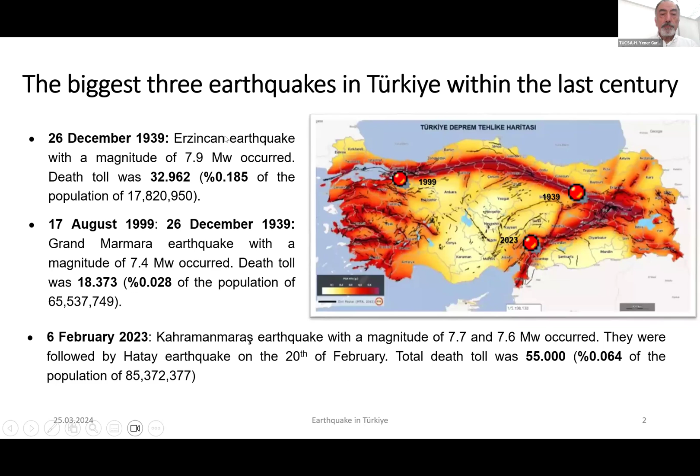Today I will mention about the earthquake that occurred on the 6th of February. This one hit 11 provinces in the eastern southern part of Turkey, particularly Kahramanmaraş and close to this area, Hatay. It was interesting because within the same day, 9 hours apart, 2 earthquakes occurred in this area, and it was very huge.

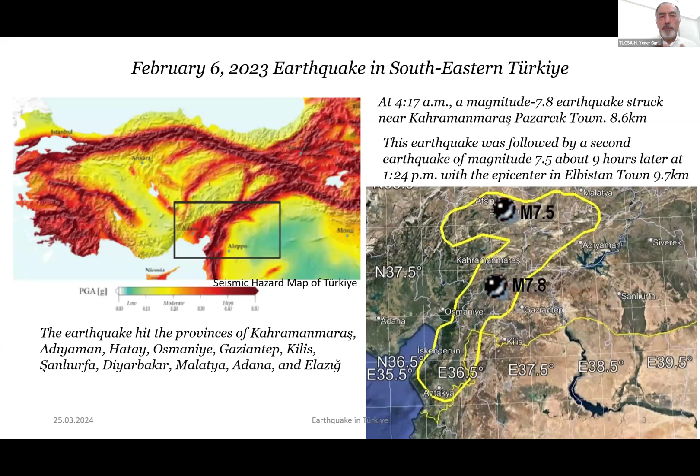In addition, although I will not mention about this later on, this is more than we expected in accordance with our scientific inputs.

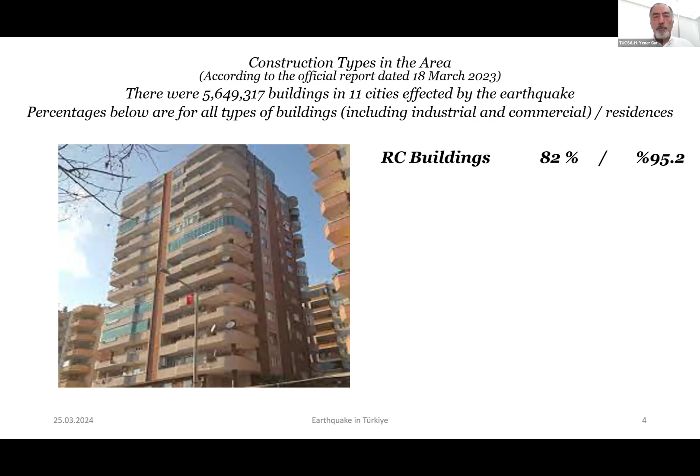Within this area, 82% of buildings were reinforced concrete in general. But when we turn to residential buildings, it was 95% of all buildings. Precast buildings also were serious, 3.6%, but for residential buildings it was 0.6%.

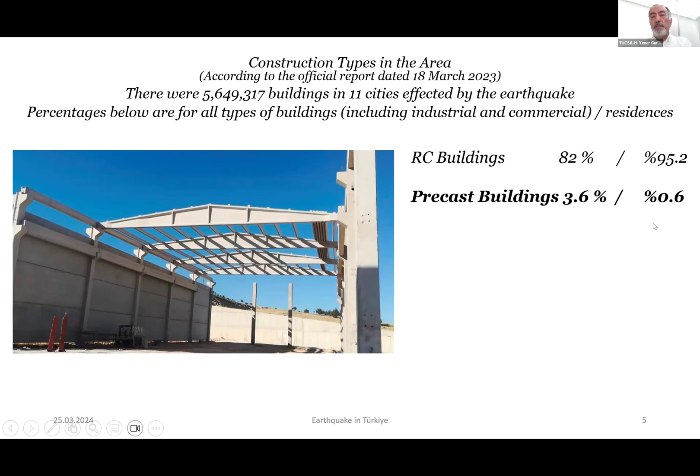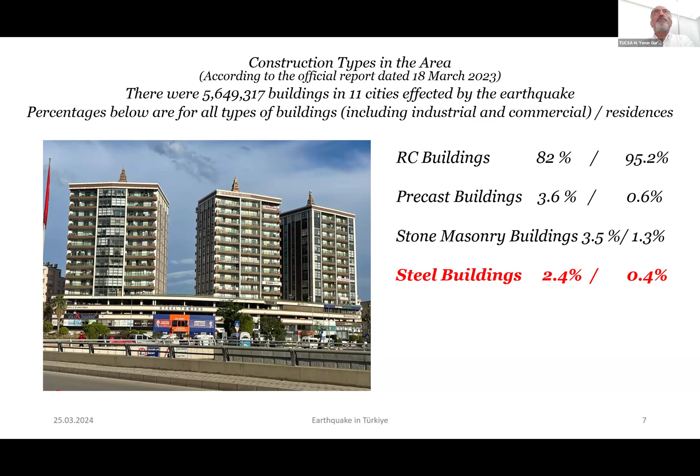Stone and masonry buildings were not so much. Steel buildings, very few - in general it was 2.4%, and for residential buildings it was 0.4%, unfortunately. These steel buildings were not damaged; they were very strong. Other buildings also not so much damaged.

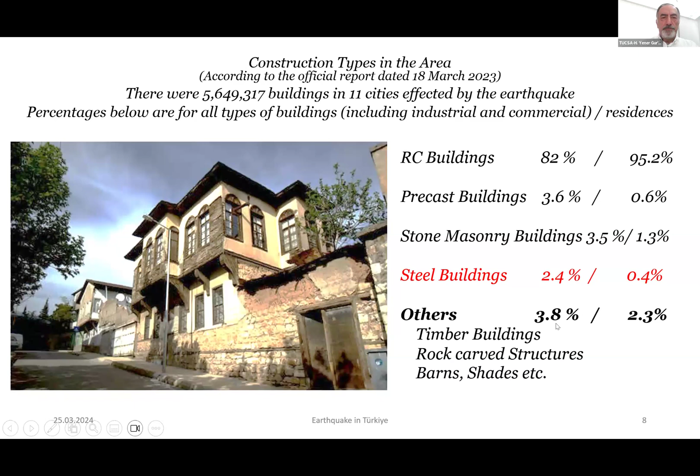Losses during the earthquake in this area, in accordance with official figures, were 55,000 people died, and 518,000 buildings were collapsed or heavily damaged, which is 9.2% of all buildings.

131,500 buildings had medium level damage, and about 1,280,000 buildings were slightly damaged.

No steel structure collapsed. 3 residential steel buildings were heavily damaged, I will mention later on. Industrial steel buildings performed very well.

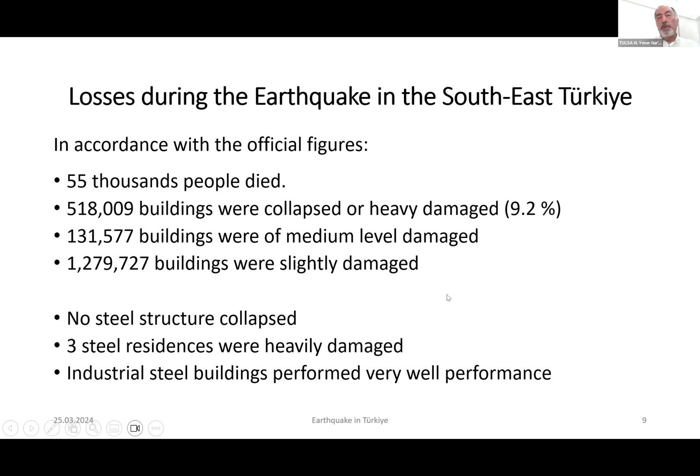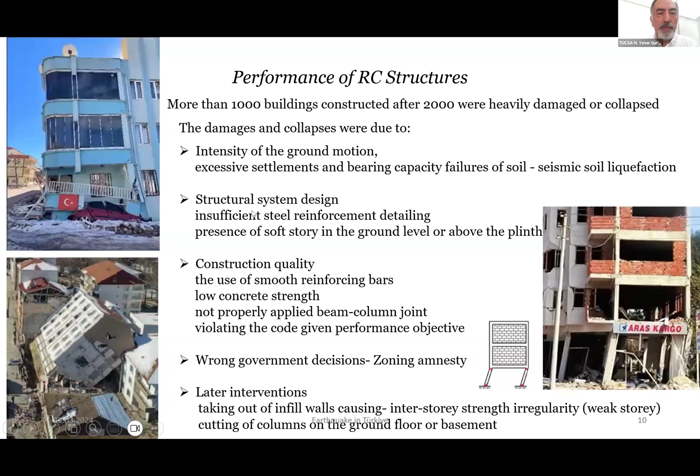Turning to performances of structures, reinforced concrete buildings were seriously collapsed or damaged, as you see here.

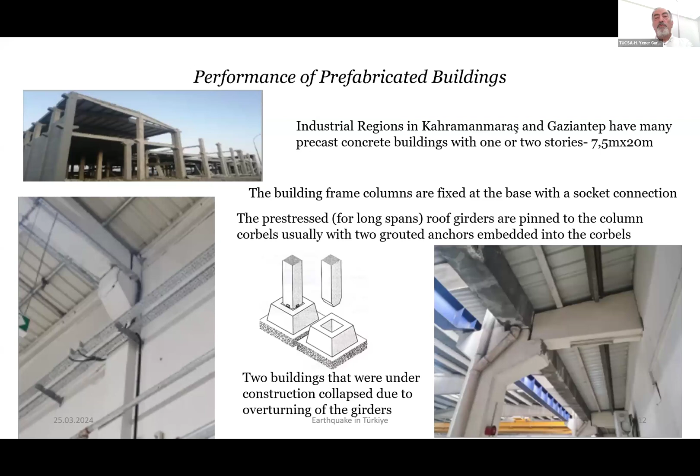Prefabricated buildings - connection points were weak and they collapsed as well. In addition, most industrial small buildings were constructed using fabricated, precast, prefab buildings, so almost all of them were collapsed or heavily damaged.

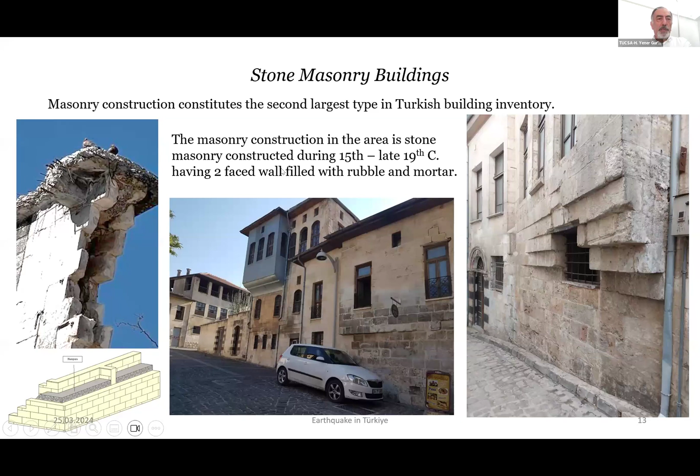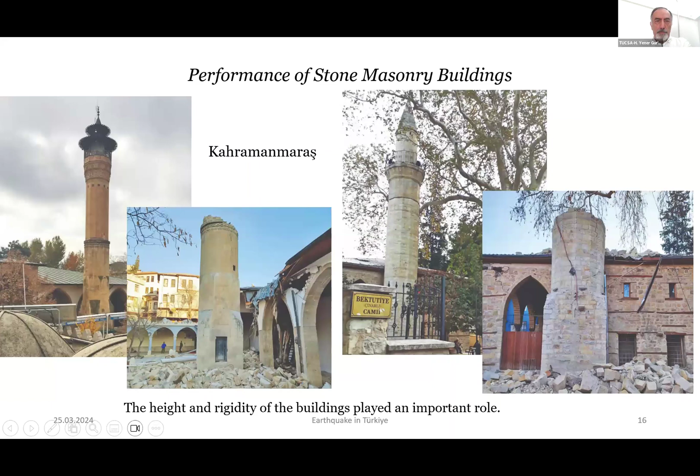Stone and masonry buildings also encountered some problems, masonry buildings as well, in different styles.

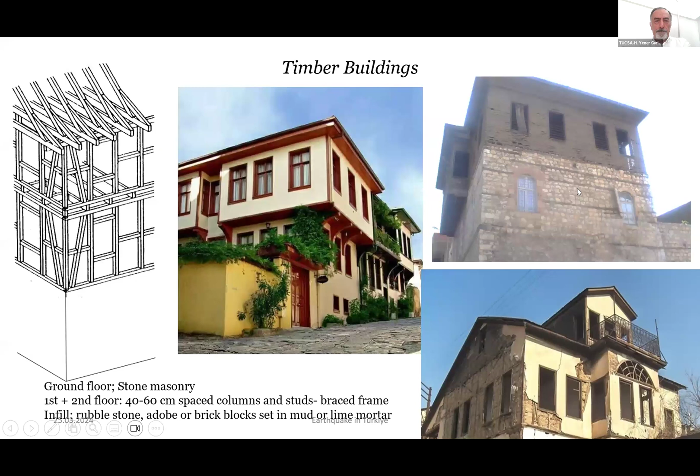Timber buildings were strong. However, roofs, particularly roofs of the buildings, were collapsed if the walls were stone or concrete.

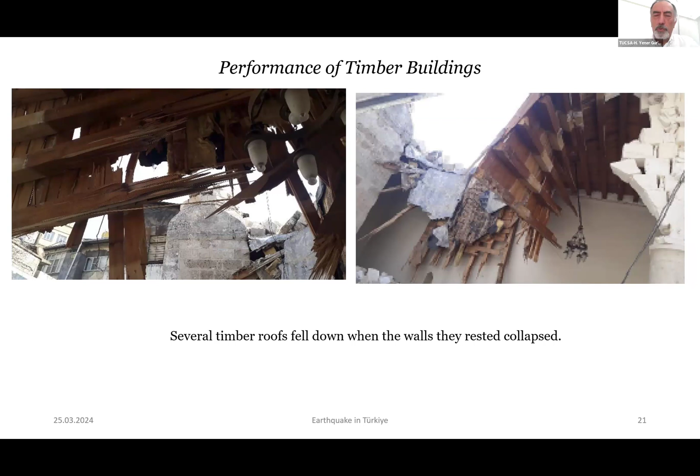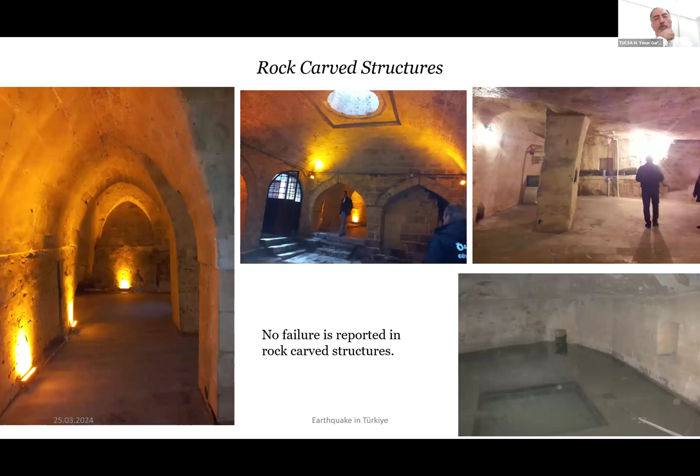Very few rock-carved structures existed, and no failure is reported in rock-carved structures. But there's a town, Erzin, in Hatay, which is the most affected area from the earthquake.

No building collapsed. It was very interesting because the mayor did not allow any illegal structures and enforced the implementation of buildings in accordance with the standards. Therefore, they were not collapsed.

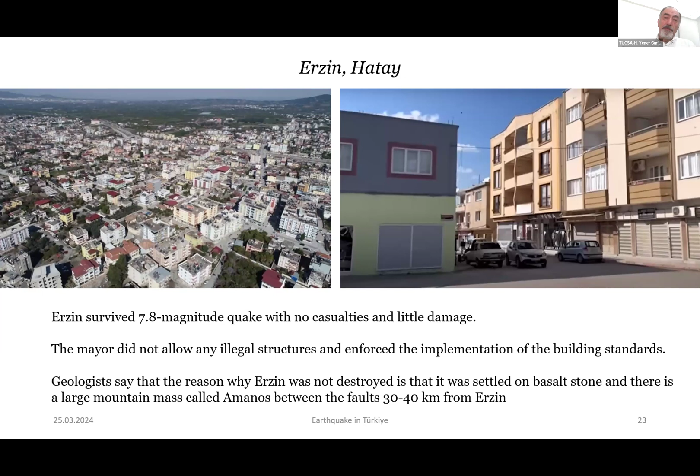But in this area, when we went there, we observed that industrial buildings were very strong. Although some of them suffered some damages, it was very easy to replace the load-bearing elements of the building.

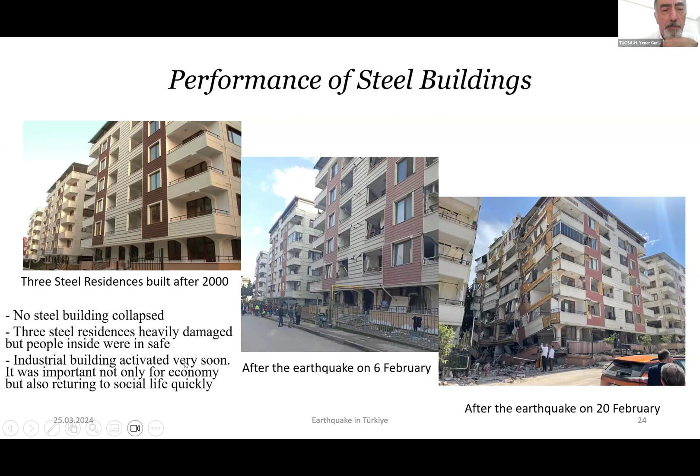But steel buildings, it's different. On the other hand, if you can restart the economy in an earthquake area, it's very important for people living in this area. That's why we recommended to construct all industrial buildings made up of steel.

Some developments after the earthquake in Turkey - I'm saying Turkey because you may not be familiar with this word so much, because the Turkish government requested the United Nations to change the name to Türkiye, because normally we were using Turkey. However, if you use either, I can understand, no problem.

Corrective activities such as rescue, shelter, meals and beverage, health and hygiene, transportation and logistics, security, burial, and similar operations have been carried out just after the earthquake. Many people were involved in these activities, personally and also governmental bodies.

However, for us, preventive activities are also very important - extremely important. Because in order not to lose life of 10,000s of people, to prevent the collapse of hundreds of thousands of buildings, and to avoid economic losses of hundreds of billions of dollars as experienced before, we have to have preventive activities.

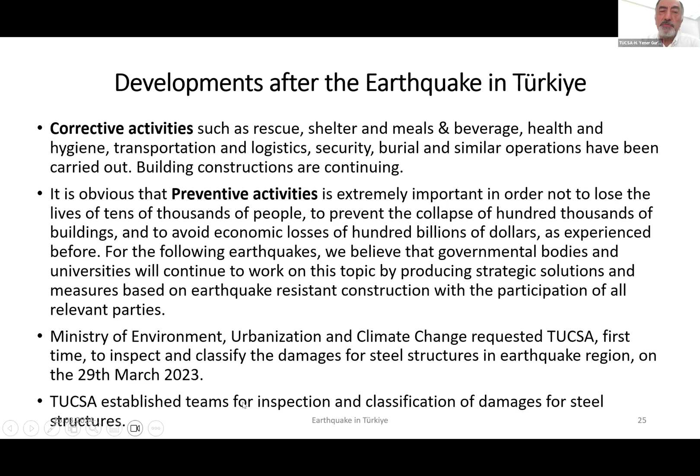We observed very clearly that steel buildings were safer than other types of buildings. As I said before, about 200,000 buildings collapsed. No steel structures collapsed.

Therefore, to increase the use of steel structures in Turkey, TUCSA achieved an online summer school of 60 hours for steel construction, held over 3 weeks in September and October, with the participation of 1,031 students, architects and engineers. It was very important because in Turkey, unfortunately, steel structures were not used so much, as there were not enough architects and engineers in governmental bodies, mayors, in everywhere.

TUCSA is trying to convince the governmental bodies to make official regulations, such as making it mandatory to construct industrial buildings in steel in seismic zones, and requiring all buildings within a certain distance from fault lines to be steel. We believe maybe 5 kilometers from the fault line, or different distances, can be determined scientifically, but within this zone, all buildings must be steel.

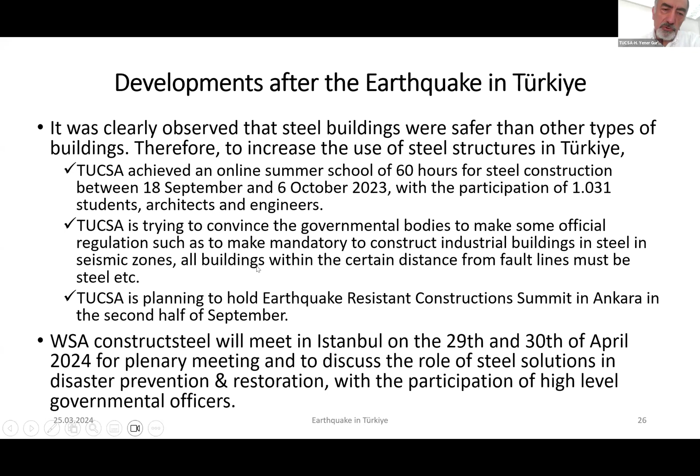In addition, World Steel Association Construct Steel will meet in Istanbul on the 29th and 30th of April for a plenary meeting, to discuss the role of steel solutions in disaster prevention and restoration, with the participation of high-level governmental officers from Turkey. Naturally, we will take part in it.

Turning to lessons learned: inspection and classification of damages for steel structures in the earthquake region. The existing Turkish rules to inspect and classify damages had been prepared for reinforced concrete, precast concrete, and masonry buildings, but not for steel structures. When we were tasked, we tried to look at the regulations on this matter, and we realized that there was nothing for steel structures. We reported this to the ministry.

Later on, TUCSA was requested to draft a regulation for inspection and classification of damages of steel structures and their repair. It has been prepared using FEMA 352. We also looked at European standards and regulations, but unfortunately, even in Europe, we couldn't find much information. We believe a similar regulation can be prepared for Europe as well, and it can be considered by the ECCS Seismic Design Technical Committee.

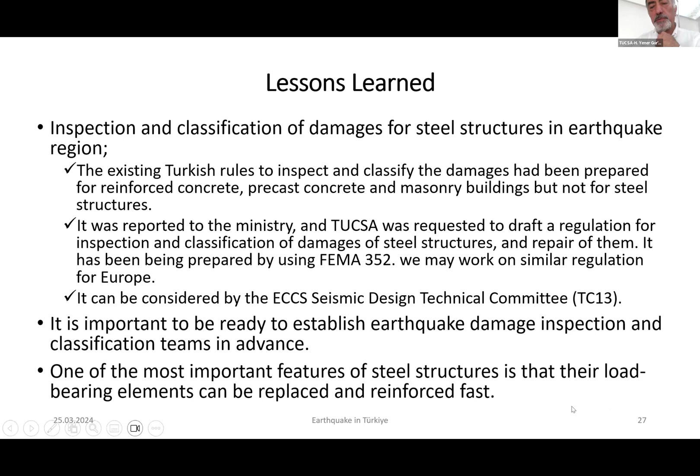One of the most important features of steel structures is that their load-bearing elements can be replaced and reinforced very fast. Indeed, it's very obvious, so we didn't think much about it before. It's natural. However, in this earthquake, we saw that it's really very important, because for concrete buildings, you cannot change columns and beams easily, but for steel structures, it can be done. That's why almost all industrial buildings must be constructed using steel.

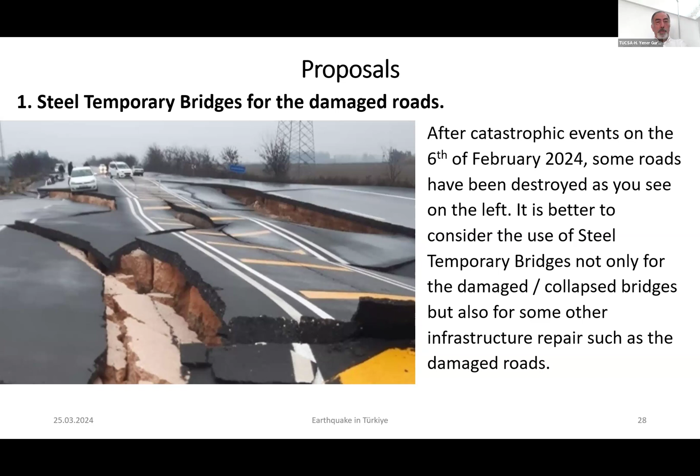Steel temporary bridges for damaged roads can be used, because some roads after this and last year's earthquake have been destroyed, as you see on the screen. It's better to consider the use of steel temporary bridges, not only for damaged, collapsed bridges, but also for other infrastructure repairs, such as damaged roads.

Regulation for inspection and classification of damages of steel structures: TUCSA recommends the ECCS Seismic Design Technical Committee consider preparing a regulation or guidance document on inspection and classification of damages of steel structures for Europe, which can be discussed also in the below mentioned conference.

The third proposal: earthquake conference in turn, I will reiterate, because maybe you remember in 2012 we recommended organizing a conference in turn, but later, last year in Amsterdam, we said once more that an earthquake conference series can be organized by high seismic risk countries of Europe, such as Portugal, Italy, Greece, Turkey, and Romania. These countries may organize these conferences in turn every 2 years. This can be discussed under the coordination of TC13 Seismic Design Committee, should it be accepted by ECCS. If this proposal is accepted, TUCSA is ready to organize the mentioned conference in 2025 autumn or 2026 spring in coordination with Yeditepe University.